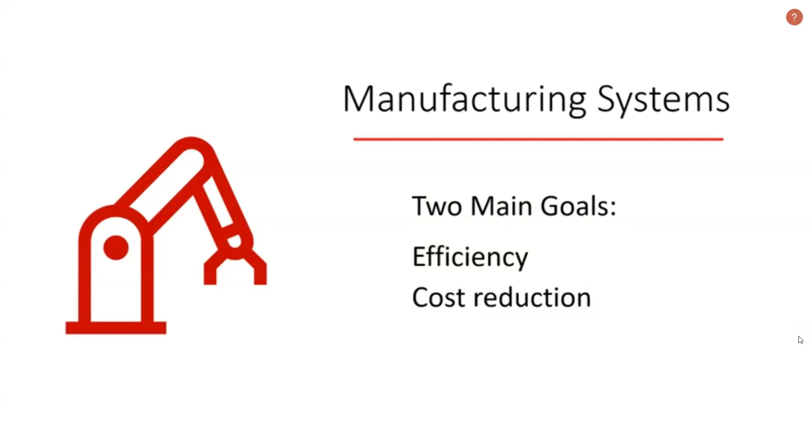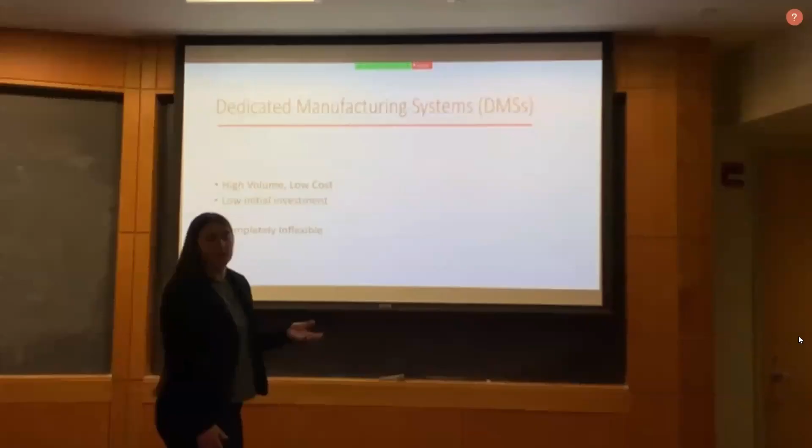One type of manufacturing system is a dedicated manufacturing system. Dedicated manufacturing systems (DMSs), or dedicated manufacturing lines (DMLs), produce one part or product over a long period of time at a very high volume. These systems are designed to mass produce these parts or products at a low cost and high throughput. They are designed with inexpensive fixed automation, meaning the initial investment is relatively low compared to other systems.

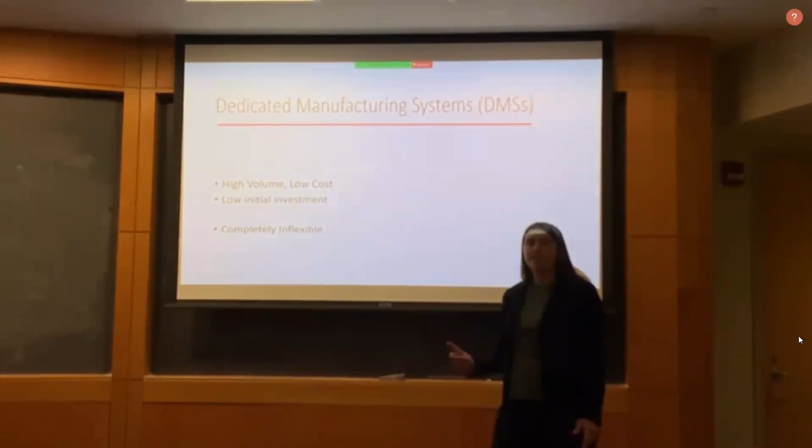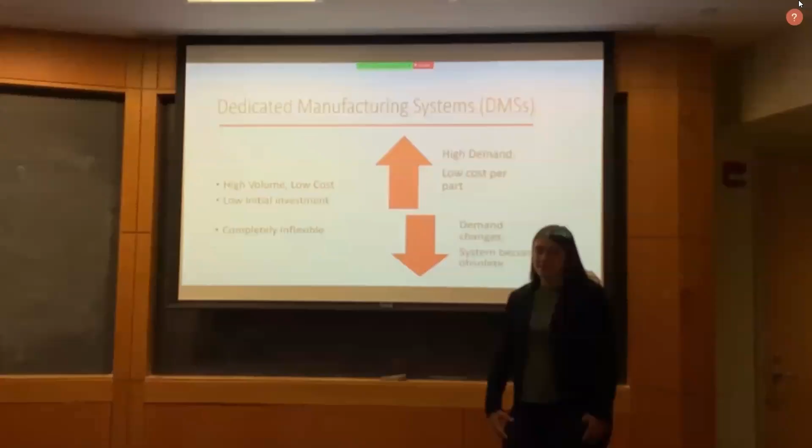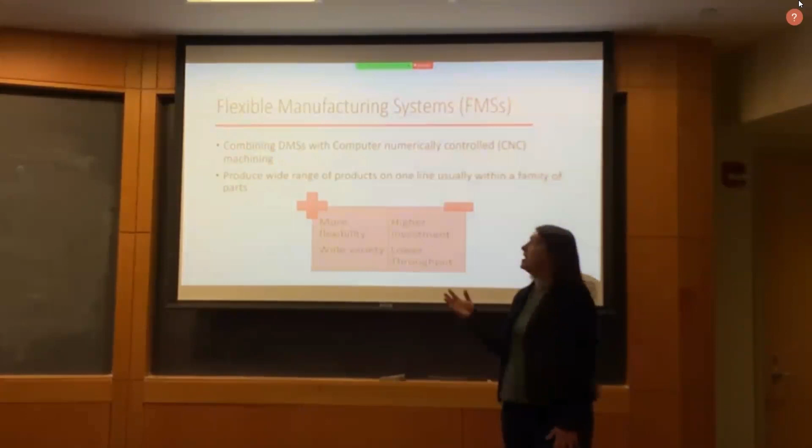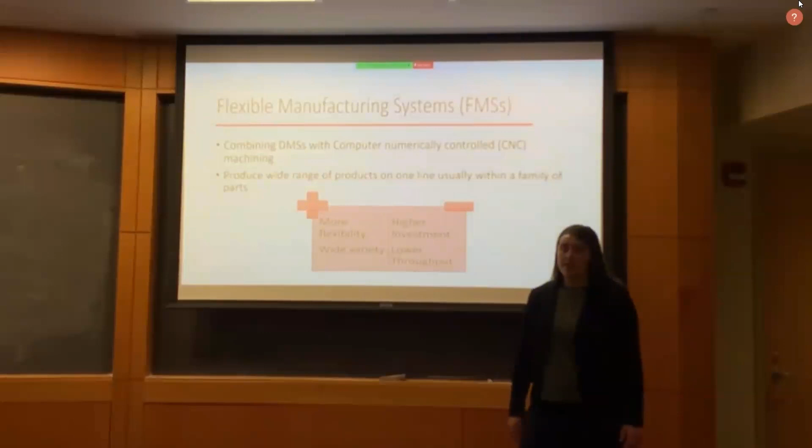The next type of manufacturing system is a flexible manufacturing system, or FMS. Flexible manufacturing systems are able to produce a wide range of products on one line with lower throughput. They contain automated, numerically controlled workstations connected through a handling system managed through a central control unit, which can manage resources to manufacture a wide variety of parts.

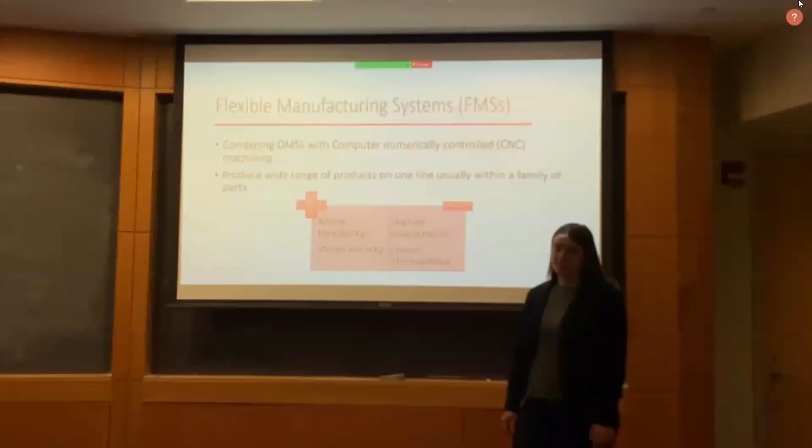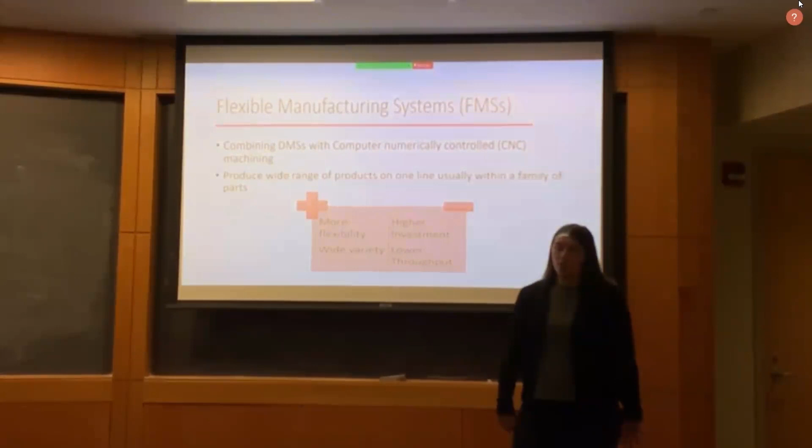These systems contain general-purpose, computer numerically controlled (CNC) machines that can be adapted to use different parts. They are more effective at managing resources and creating a variety of products with parts on the same line. CNC machines typically only use one tool at a time, which can reduce the throughput and makes them less fast than DMS for the same investment cost.

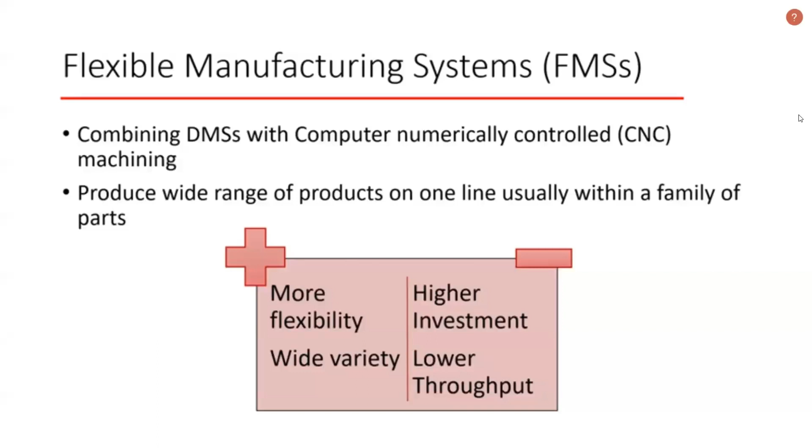Overall, FMSs are more flexible than DMSs in a changing market, as they can adapt to new demands in the system and produce a wider range of products, but they do require higher investment over time and have a lower throughput.

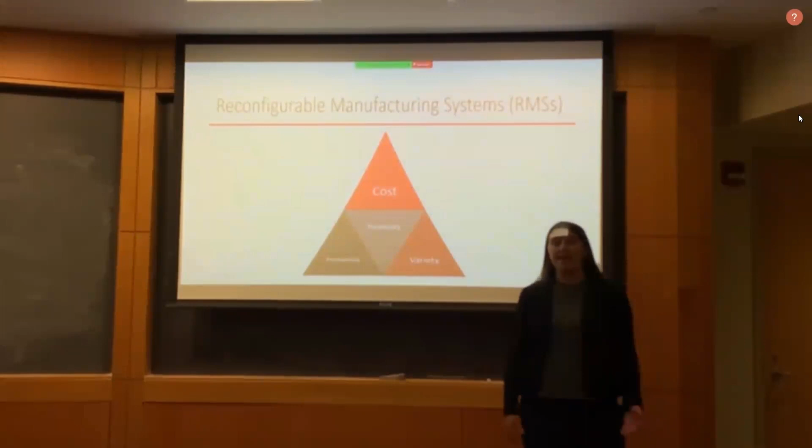In order to gain the benefits from both dedicated manufacturing systems and flexible manufacturing systems, reconfigurable manufacturing systems were created. RMS combines the high throughput from DMSs and the flexibility of FMSs to be able to rapidly and efficiently adapt to changes in the market.

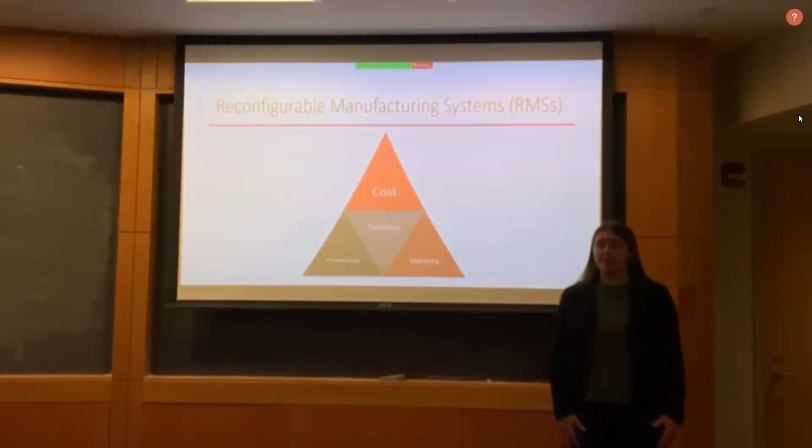In addition, this system is designed for rapid change through the ability to adapt the functionality and capacity of machines in the most cost-effective way in response to demand within the market. This chart shows the overlapping values of reconfigurable manufacturing systems alongside DMS and FMS, such as reduced cost, versatility, and responsiveness, along with the dates when all of these systems were introduced.

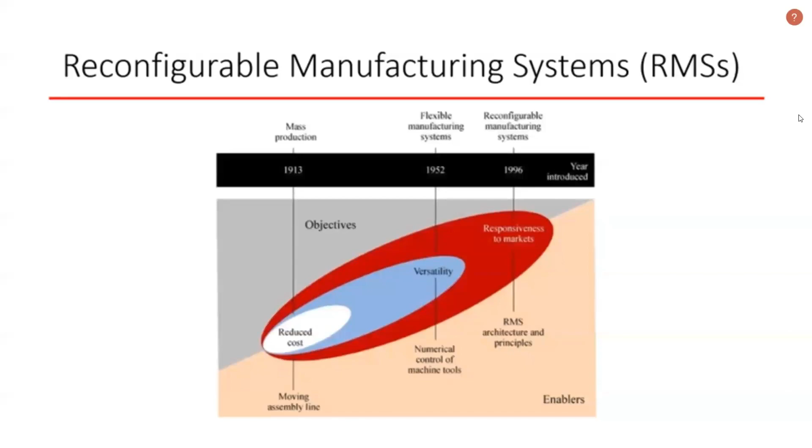RMS has six principles that enable it to reduce the effort and time needed to produce parts and reconfigure, as well as reduce the lifetime cost and keep production high during changes in market and consumer demand.

The first characteristic is modularity, which is the compartmentalization of manufacturing system functions into units that can be changed between different arrangements for the optimal arrangement. The second is integratability. This is the ability to integrate different modules rapidly and precisely using hardware and software controlled interfaces that facilitate communication and integration.

Diagnosability is a system's ability to automatically read the current state of the system, to monitor product quality, and diagnose any problems to rapidly correct them. Convertibility is the ability of the system to transform the current functionality and adapt to new production and market requirements.

Customization is within the design of specific machines or systems to keep the machine flexibility limited to a specific part or product family, to increase customized flexibility. Scalability is the capability of the system to add or remove system components or manufacturing resources to modify production capacity.

All of these 6 characteristics work together to produce an RMS system, which creates the highest efficiency, scalability, and flexibility for the system. So the first case studies we looked at are about body-in-white manufacturing.

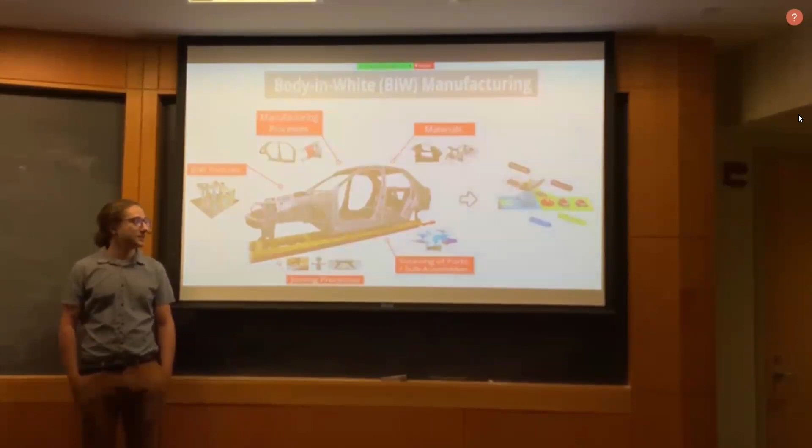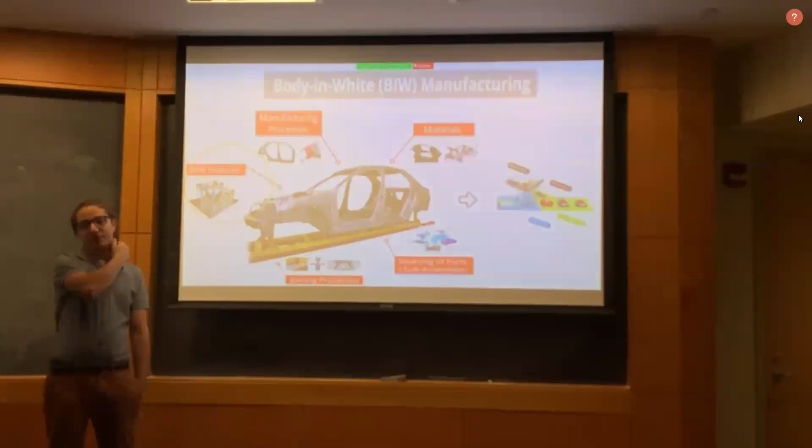Body-in-white manufacturing is the manufacturing process for creating the general frame of the car. Almost all the parts here are welded sheet metal parts, and we'll be looking at the fixturing over here of the parts for the body-in-white of the car, and that's a lot of fixturing for spot welded components.

Traditionally, fixturing for the body-in-white parts to be welded is not modular at all. It's not flexible, so they're only made for one specific model of car, and you can't reuse them or adapt them to multiple models of car. But with reconfigurable manufacturing, there are some tools that help us out.

We've looked at 2 case studies of flexible fixturing. With flexible fixturing, you can reconfigure the fixturing so it can adapt to multiple models of vehicle. You can also make adjustments, and you can actually reuse a lot of the frame of the fixturing or various elements depending on the strategy that we'll talk about a little bit later on.

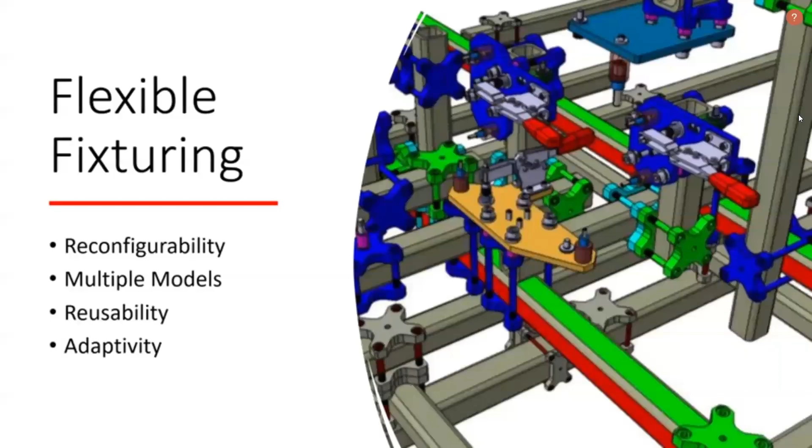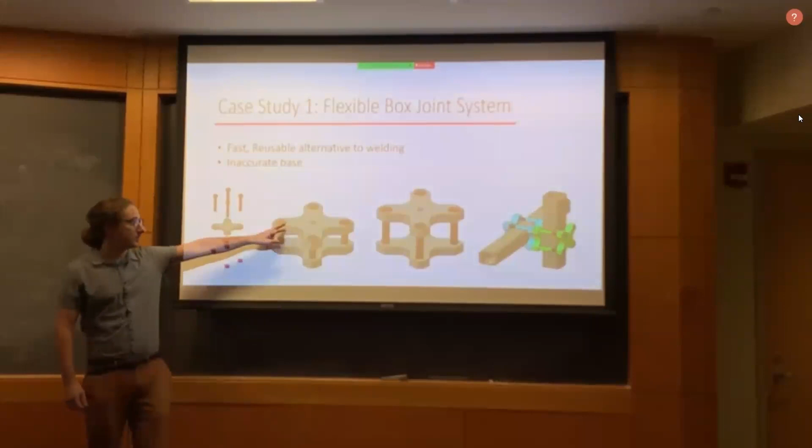The first case study used what they call the box joint system. Typically, the frame is made out of welded square tubing, but here they clamp together the square tubing using machined steel pieces like this with screws in between. This allowed them to construct the frame of the fixturing very rapidly and quickly. But the downside of this is that it's not accurate at all.

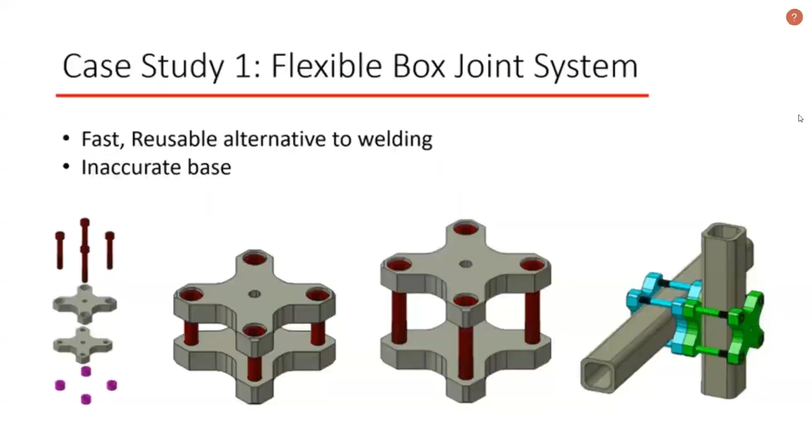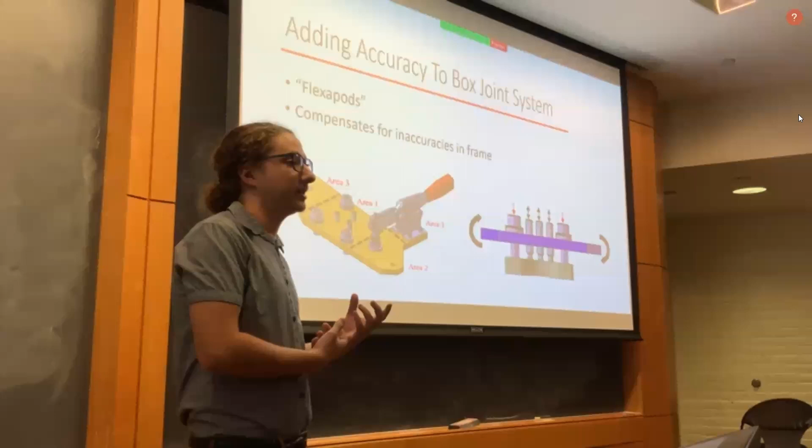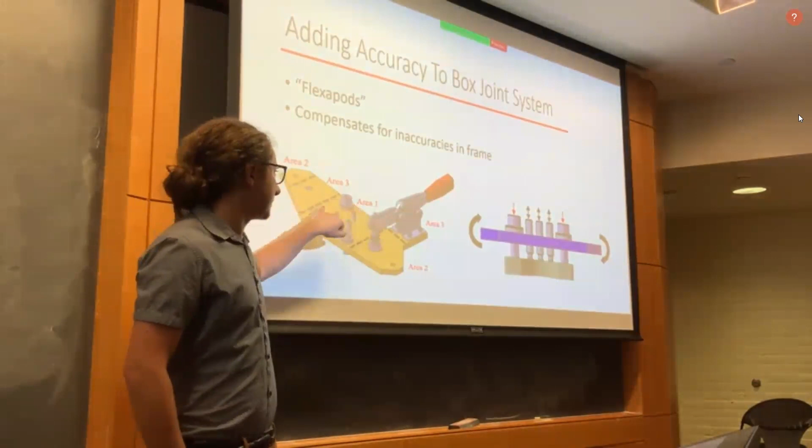To compensate for this, they created what they called Flexapods. Attached to the inaccurate clamped together square tubing frame, they have these modules that have 6 degrees of freedom, so they can rotate 3 ways and also move translationally. They also have the interfacing geometry over here to locate the part onto, because that's critical as well. These take a while to set up, but it helps compensate for those inaccuracies in the clamped together frame.

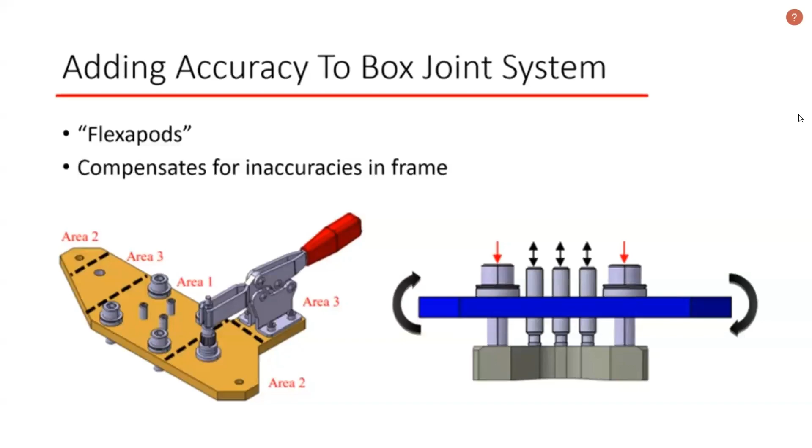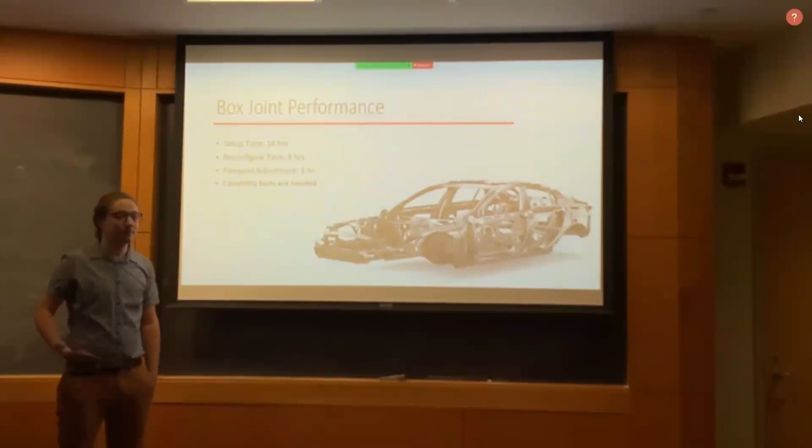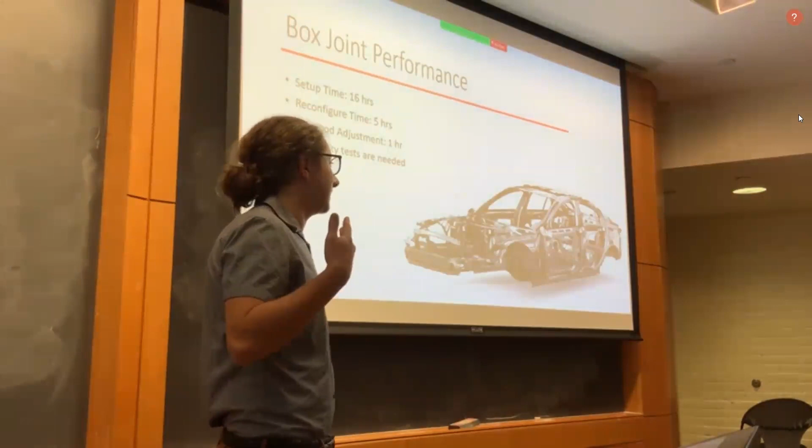About the performance of the system, they measured that the setup time in total was 16 hours, which isn't insignificant, but you have to keep in mind that when the frame is being welded together, that also takes a significant amount of time. To reconfigure it for a different model of car, it only took 5 hours, which is pretty impressive. Then to adjust and tune the Flexapods, which are sort of complex to do, took them 1 hour, but they noted that that's a very high skill task.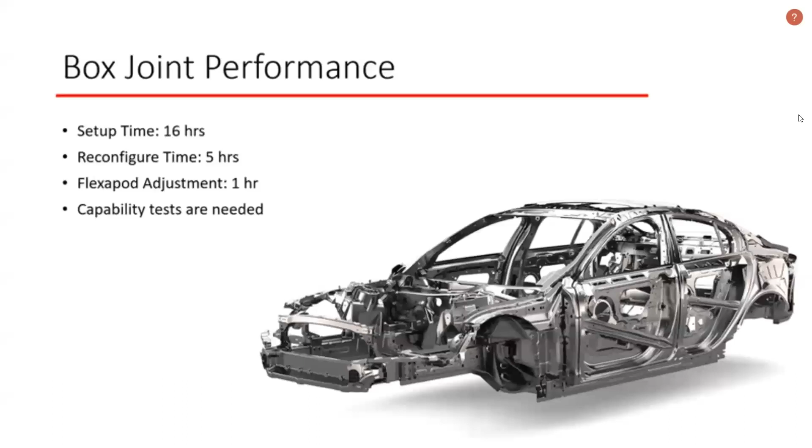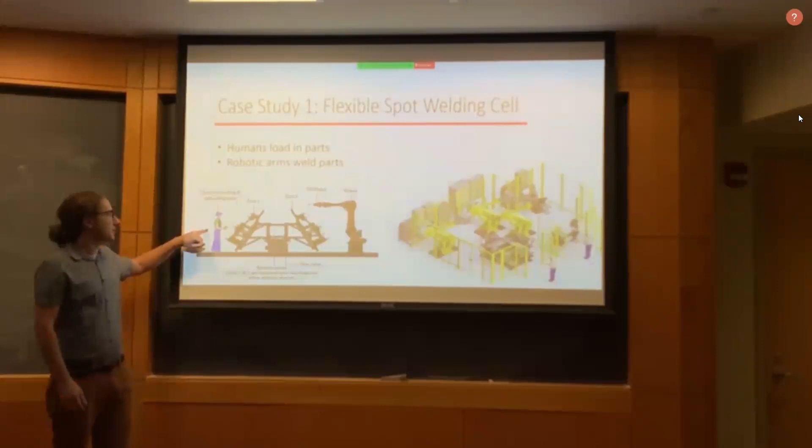Second example has some similarities. They've tested out the interior of a car door for their spot welding assembly, and they have a cell over here that has a human worker and a robot worker. The human worker's job is to load the parts onto the fixture plate, and then it rotates around so the robot can weld it, while the human loads another one in.

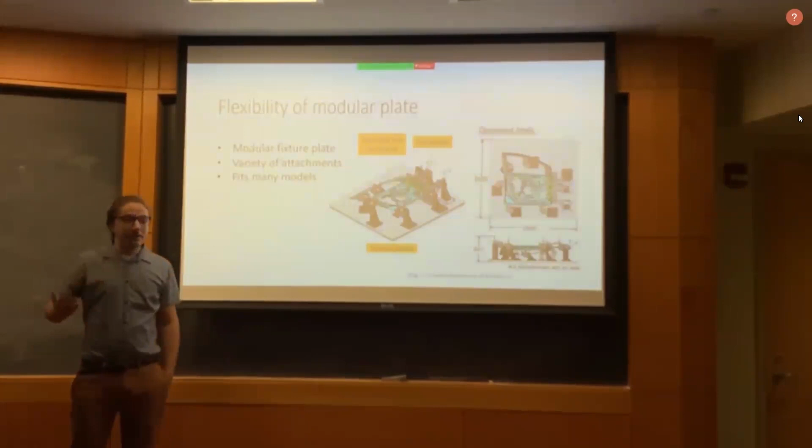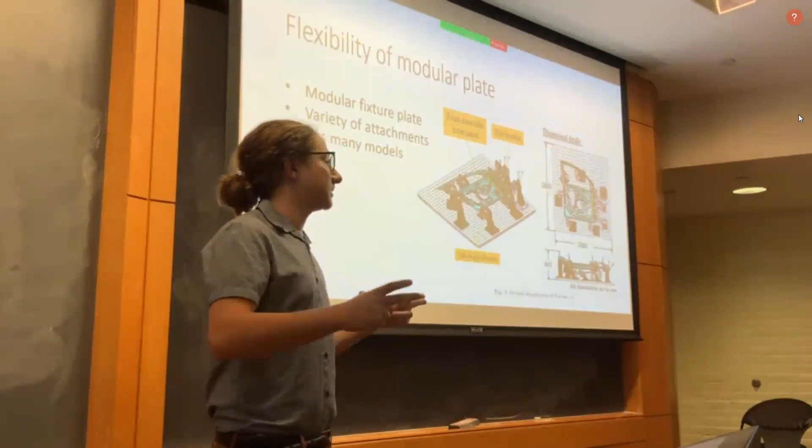How they made their fixturing flexible is they have a base plate over here with tons of holes in it, and then there are different posts that have clamps and interfacing geometry and locating geometry on it to actually secure the interior of the car door onto. This way you can reuse the same fixture plate and just put different posts like these onto it for different types of car doors.

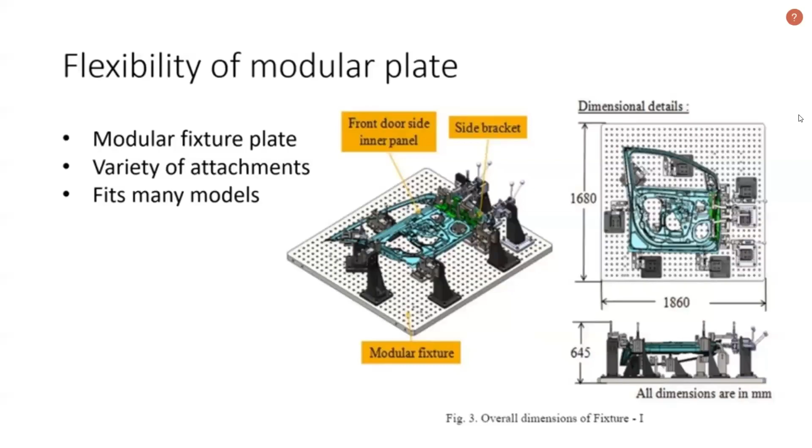They saw a really impressive improvement. They did it for 2 types of car doors. You can see the 2 types over here, and the improvement they had. They almost halved the cycle time of both of them, and the robot utilization went way up. That was mostly because of the rotating aspect of it, but that was also impressive. And then the number of components for a single shift also improved.

All right, so a second case study we identified was titled Implementation of Reconfigurable Manufacturing Systems, the case of the Lego Group. In this case study, they dived into how the Lego Group approached considering a new manufacturing system.

So in an ever-changing, chaotic and competitive global market, manufacturers have been attempting to discover new concepts and systems for manufacturing to keep up and remain competitive with other companies.

This paper examined potential areas of manufacturing processes that would be the most fitting for implementing RMS within. A literature review was then written and outlined in the case study to describe the benefits and main characteristics of RMS.

Then the case study goes into a conceptual model that was created to analyze the most appropriate areas for RMS to be used within the Lego Group specifically to maximize the benefits within the company. Finally, a conclusion is formed from the analysis collected through the developed conceptual model.

Responsiveness, capacity, functionality, and cost are the 4 features which define the difference between RMS, FMS, and DML. RMS is able to make a rapid and cost-effective response to market changes globally.

In addition, RMS is dynamic and is able to change both capacity and functionality in response to these market changes, which shows a great advantage in the adjustment of capacity and functionality.

RMS is also super scalable and at non-constant rates that depends on the initial design of the RMS and the changing market situation. Compared with FMS and DML, RMS will not be more expensive.

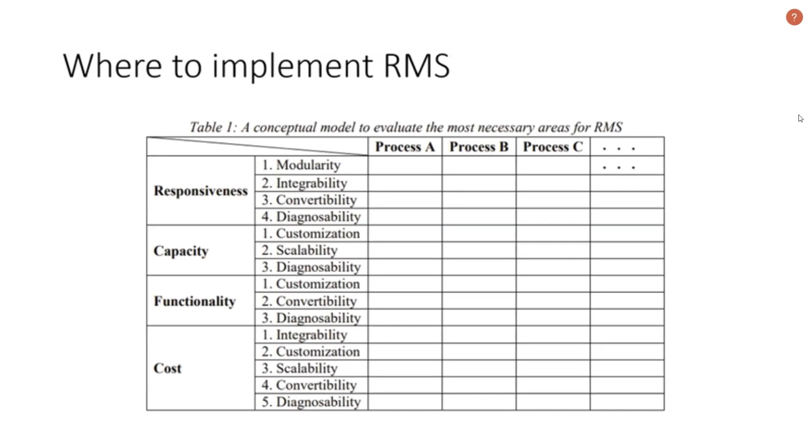The LEGO Group's production contains 4 main processes: molding, decoration, assembly, and packaging. Values between 0 and 1 are given to have a better understanding.

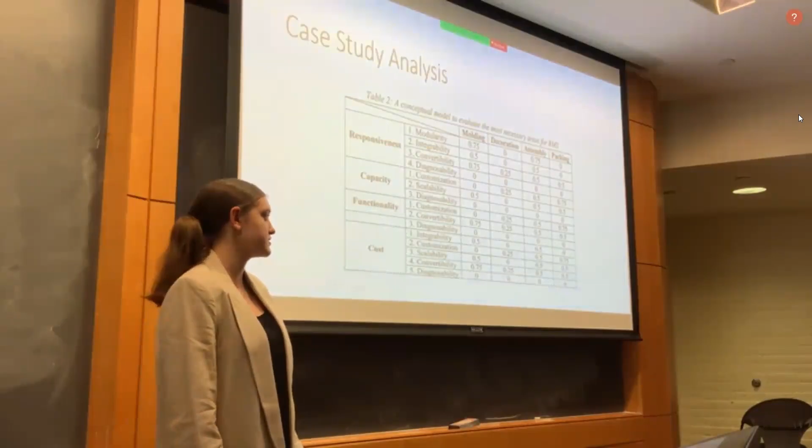This table shows that responsiveness has 4 determinants, while capacity and functionality each have 3, and cost has 5. By adding these determinants all together, a new table is created to show the respective values of responsiveness, capacity, functionality, and cost in the LEGO Group's 4 production processes, which are shown in Table 3.

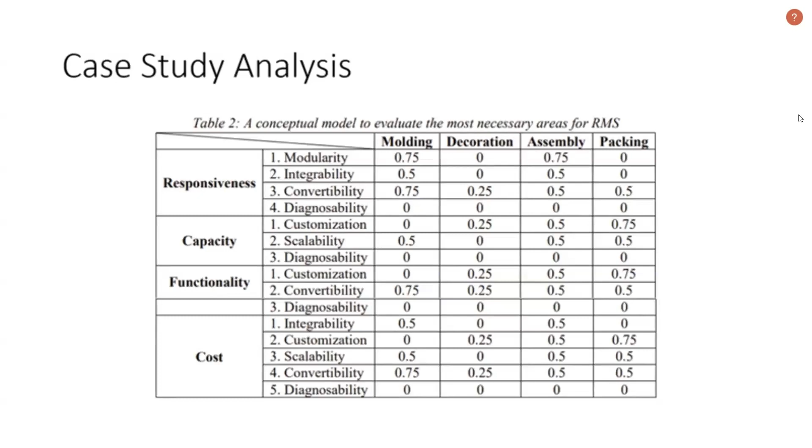From Table 3, Table 4 can be created, which includes the percentages of the 4 features each process gathered. This shows the extent of the accomplishments these processes featured of the 4 categories of responsiveness, capacity, functionality, and cost.

Table 4 indicated that because there are no results higher than 50%, there's a lot of room for improvement within the LEGO Group's production in regards to the advantages of RMS overall.

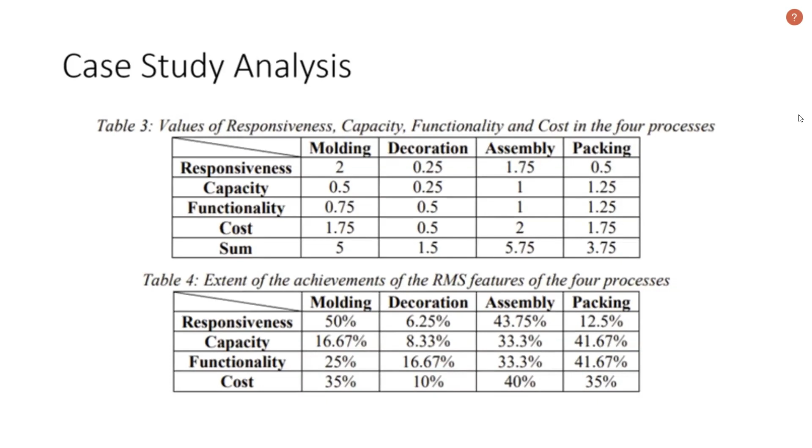Once again, it can be concluded that there is plenty of room for improvement in these RMS features for the LEGO Group's future production systems, but particularly in the area of decoration, while there's also room for improvement within molding, assembly, and packaging as well.

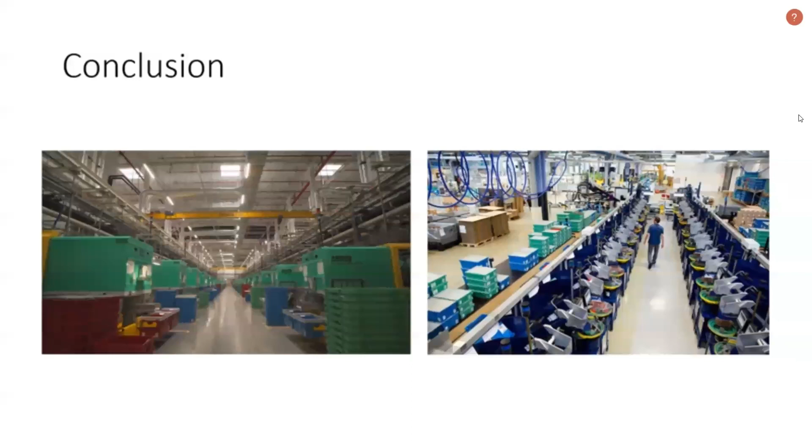All right, so to recap, we've discussed the main advantages of RMS based on a literature review and discussed the proposed conceptual model to analyze the most suitable areas of RMS implementation into the LEGO Group. The LEGO Group's case study analyzed the most suitable production processes for RMS within their company.

Well, there's already been a lot of application of RMS that we've seen so far in industry. There's a lot of future directions that RMS is going in Industry 5.0.

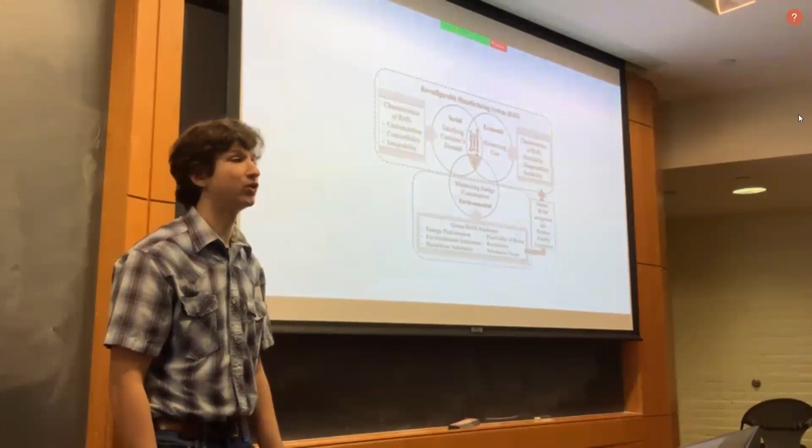One main application being seen more of in RMS is sustainability. Sustainability is a huge focus of Industry 5.0, and integrating sustainability with reconfigurable manufacturing systems and optimizing these systems for sustainability is a big area of research.

One concept specifically being researched is mathematical models to more accurately model different energy uses and sustainability of a reconfigurable manufacturing system. There are different models measuring exactly the amount of energy that moving an object from one area of manufacturing to another takes, and then optimizing that mathematically so you can set up your modules in the most efficient way possible to make your process more sustainable.

Not only does this save energy, but it also saves the company money in the long term and minimizes a lot of cost. Another concept being reviewed and starting to be implemented in reconfigurable manufacturing systems regarding sustainability is a green BOM. This new concept involves having a BOM where you can see exactly how each part of your system affects the environment. There are different parameters like how much energy you use, how much you can reuse your systems, and recyclability, that you can evaluate in a green BOM and then optimize your RMS based on the results.

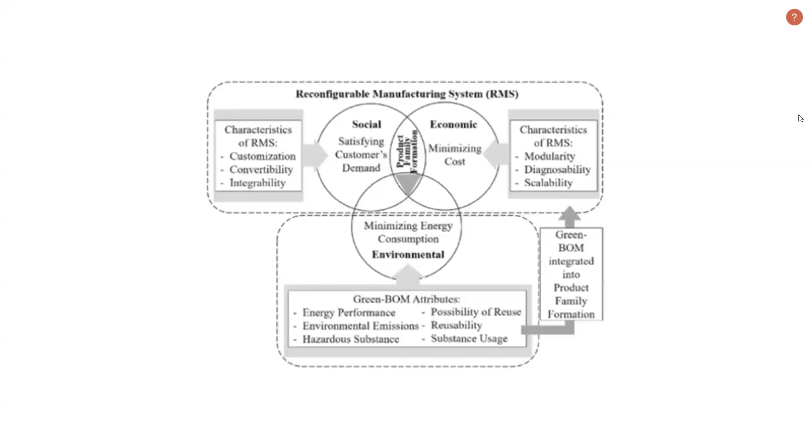While the digital twin has seen a lot of new implementations in dedicated line manufacturing, it's just starting to see implementation in RMS. This is important because to have a reconfigurable manufacturing system, you not only need a reconfigurable physical system, but you need reconfigurable software. A lot of this requires some kind of digital twin to model exactly what's going on, both in the physical space and in the software space, and then being able to reconfigure that. So a digital twin is of particular interest and use in a reconfigurable manufacturing system.

This has really been made possible thanks to a lot of new Industry 5.0 techniques, such as Internet of Things sensors, cloud-based storage, and 5G, that allow the transfer of large amounts of data and sensor data to be collected from the physical systems and then modeled in the digital twin.

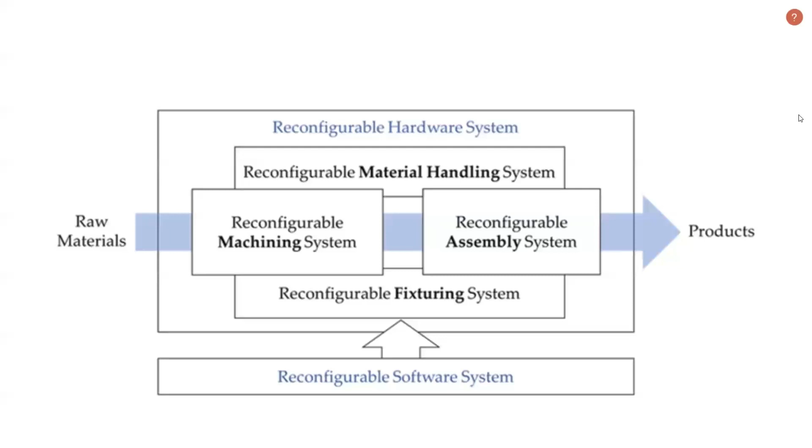Another special use of the digital twin in reconfigurable manufacturing systems is using it to optimize the system. While a regular manufacturing system can't really change based on feedback from the digital twin, a reconfigurable manufacturing system can easily change, and this is one of its big strengths. You can take what you learned from your digital twin and make your RMS more efficient.

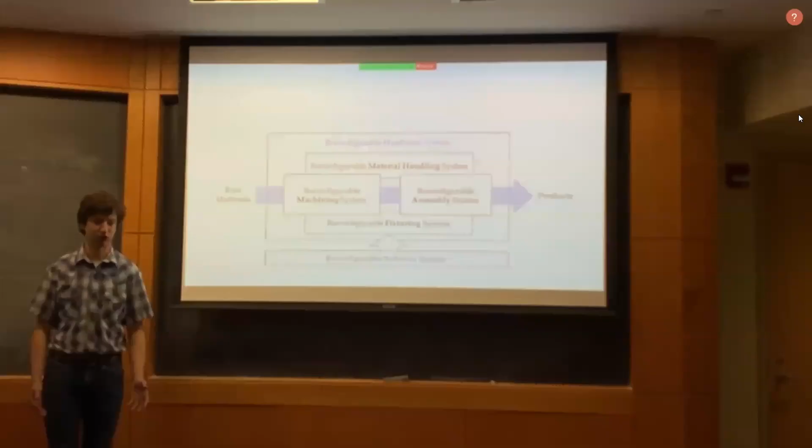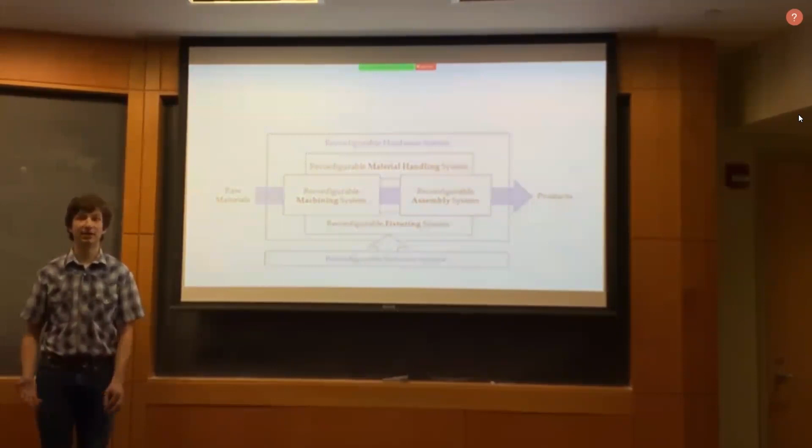However, there are a lot of challenges to implementing a digital twin accurately. These include actually transferring the vast amounts of data to wherever you're storing and analyzing it, as well as then analyzing that data, which takes a lot of computing power. This is something that is just starting to be done.

One of the main ways this computing and analyzing of digital twin data is being done is with artificial intelligence. The use of AI in RMS has been gaining a lot of traction, especially in implementing things like the digital twin, but also in regards to sustainability and analyzing all the data and optimizing your system based on whatever parameters or feedback you might have and configuring it. Artificial intelligence can reconfigure a system based on feedback from IoT sensors and optimize your setup based on feedback from the AI. This can have significant impacts in forming and utilizing an accurate digital twin, as well as optimizing systems for sustainability.

A recent study directly applied artificial intelligence to a reconfigurable manufacturing system in a much smaller scope, using AI to minimize the amount of repairs and tool degradation over time within a system. The study was very successful. The AI was able to reconfigure a manufacturing system to use fewer modules at once, so that more modules could be having repairs or maintenance done, resulting in less tool downtime and fewer failures and broken tools throughout the manufacturing process.

In the future, the small scope of this study is probably going to be expanded to other studies and overall artificial intelligence that can optimize reconfigurable manufacturing systems for a greater number of parameters.